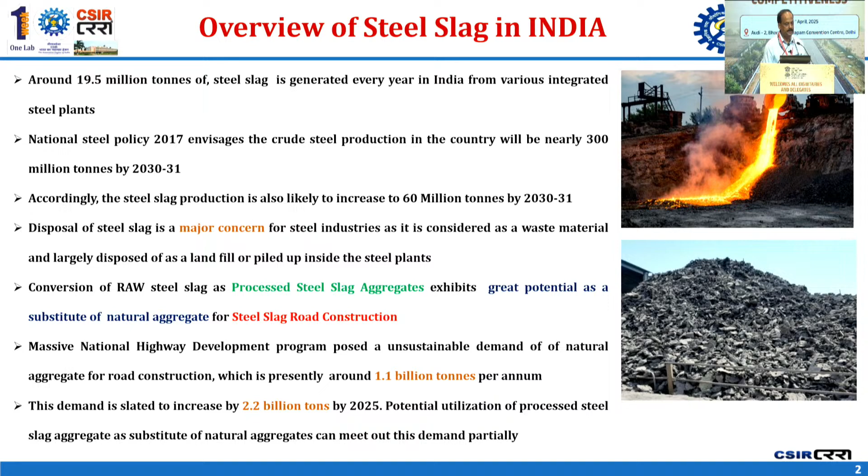So the steel slag based road construction provides an opportunity where processed steel slag can substitute natural aggregates. In terms of steel slag produced from various steel industries, currently it is 19.5 million tonnes, and by the end of this decade, it is going to exactly double.

We have already done trials. This is one example near Surat, a 6-lane facility in which steel slag has been utilized in all layers for flexible pavement construction. Another example is NH66 from Mumbai to Goa.

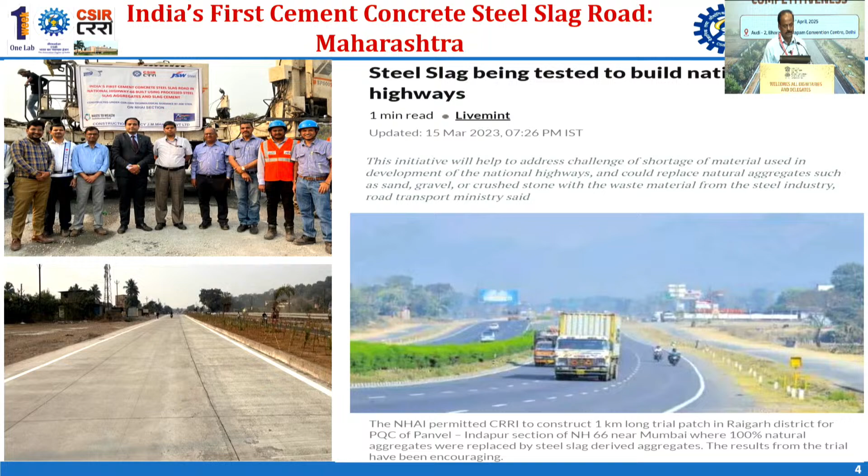In fact, we did it in association with NHAI, where steel slag has been utilized both for construction of cement concrete roads and bituminous roads, and in all layers steel slag has completely replaced natural aggregates. Another example is a trial at Arunachal Pradesh near Ziro Valley.

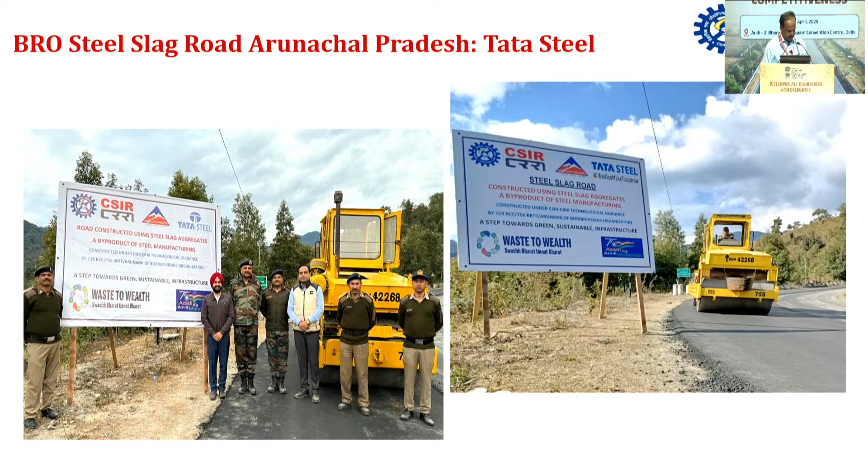This was basically for the design of overlays, for a 40 millimeter BC overlay, where steel slag was used. This project has been possible because of sponsorship from the Ministry of Steel, done in association with AMNS, Tata Steel, JSW Steel and RINL.

It has received attention of the Honorable Prime Minister because the project is being pursued under the Mission Waste to Wealth, which gives a specific mandate of using various industrial wastes for construction of road infrastructure. Steel slag guidelines have been prepared by the Ministry of Steel and disseminated to MoRTH, and currently it is also under consideration of the H2 Committee of the Indian Roads Congress, because at the end we are expecting an IRC document on the basis of which it will be possible to scale up its application.

The second is replacement of bitumen. This is the idea of biobinders from agricultural waste. Currently we have a project sponsored by the Ministry of Road Transport and Highways. CRRI has a patent where it is possible to replace 10 to 20% of bitumen by bio oil, which is produced from rice straw.

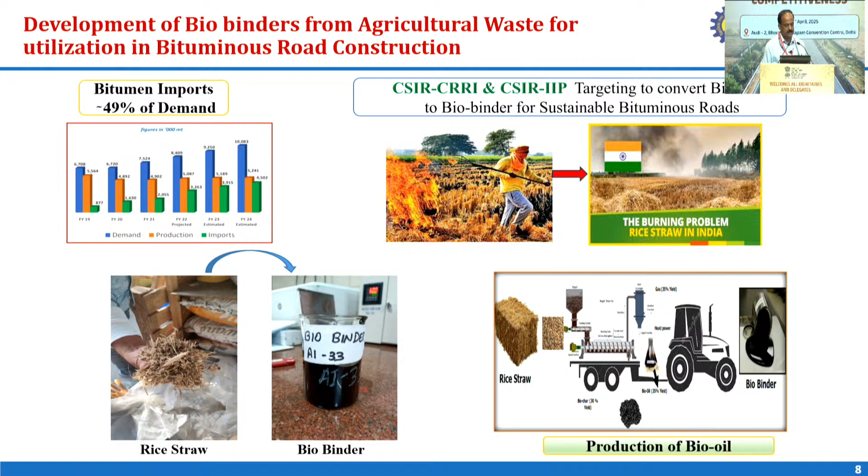Because of the parali burning problem, this has been taken up, and CRRI, Central Road Research Institute, in association with IIP Dehradun, developed this technology. We did a trial at Jorabat between Guwahati and Shillong, and another trial which is slightly different from the earlier process.

That earlier one was a bio-oil based biobitumen, but this one is from lignin, and we did trials with 15% replacement and 10% replacement. Currently we are doing finishing testing with Indian Oil.

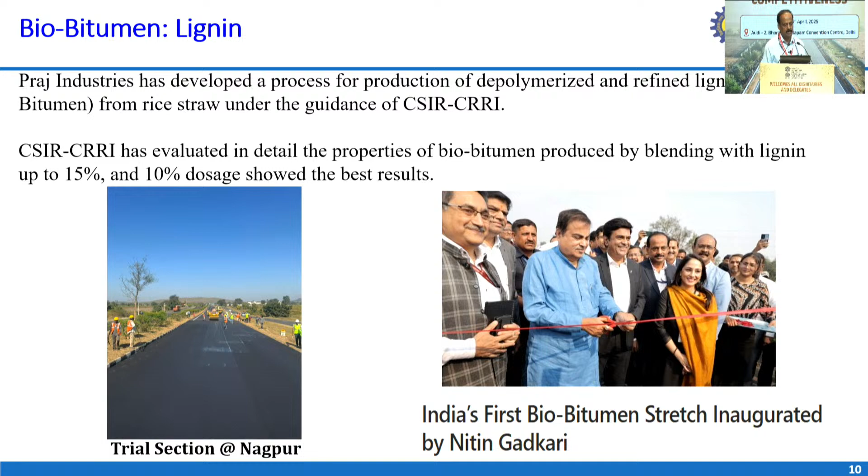The Honorable Minister has reviewed the whole activity. A 1 kilometer trial has been done near Nagpur, and we have been asked to put up detailed specifications and standards for this lignin-based biobitumen, so that it can be utilized for road construction.

A little bit about cold mix technologies. If we make a comparison between cold mix versus hot mix, although this is for rural roads, in terms of fuel, for cold mix construction it is 90 liters of fuel, while for the same reference, hot mix is going to be 1698 liters of fuel.

So, in terms of carbon emissions, the cold mix is going to be very effective, but in terms of practice, although in a lower category network it has been very effectively utilized, we are yet to see its application with respect to higher categories.

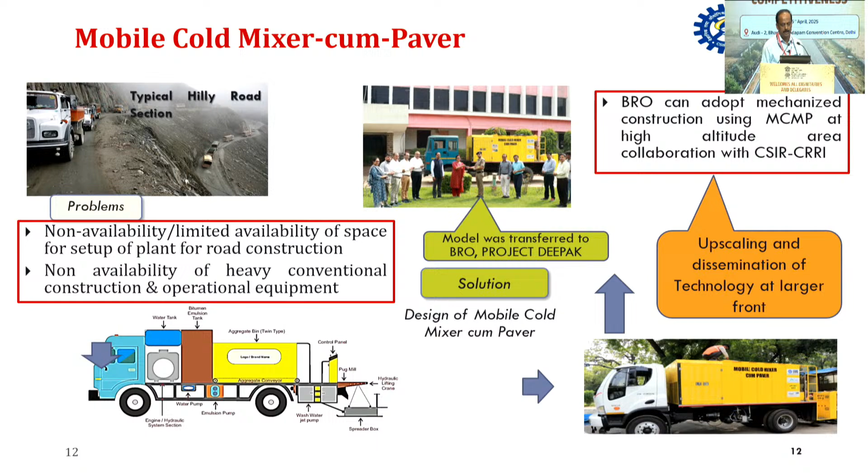This is one mobile cold mixer cum paver we have developed and transferred to BRO. The technology can be used in hilly areas. Currently the equipment is in Himachal Pradesh, deployed for different projects of BRO. So NHIDCL can take benefit of this.

This is a road which has been constructed using this mobile cold mixer cum paver. This basically addresses the challenge of space limitation to set up a plant through a mobile mixer. You can do that paving work.

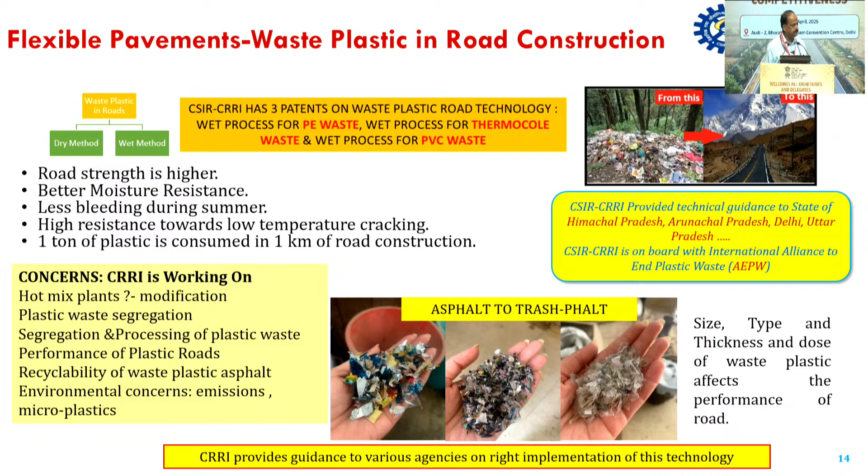The institute is working on usage of waste plastics for road construction. There are 3 patents with respect to the wet method of mixing, and currently we are working with one particular agency, Alliance to End Plastic Waste. So there is great opportunity of utilizing plastic waste for bituminous mix road construction.

There are certain other technologies developed by the institute. This one is used for pothole repair. Very recently we did a demonstration with the government of Delhi to the PWD minister, showing how to repair a pothole without dewatering. The technology has entered into agreement with the government of Assam and is in discussion with the government of Karnataka for wider application. Currently cold emulsion based mixes are being utilized for pothole repair.

This is an alternate that uses the cold process only. The other technology under discussion is the EcoFix.

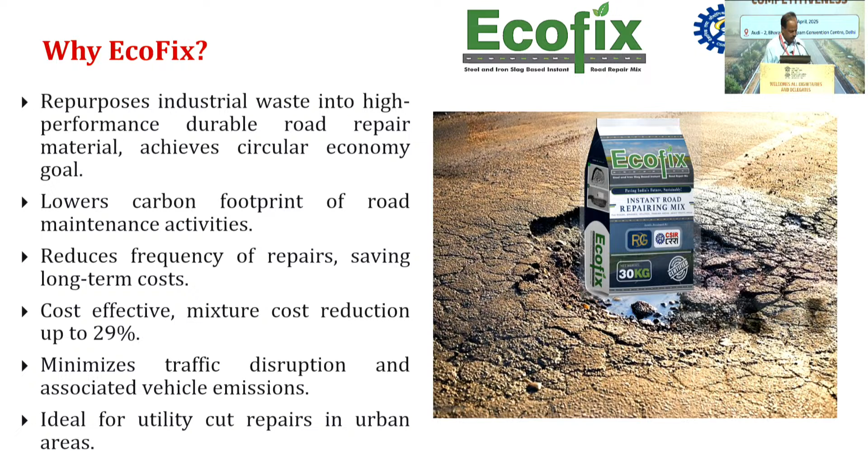As an institute we have the mandate for developing technology and transferring it to industry. Then there's the idea of recycling—currently we have a limit of only 30% RAP that can be utilized, but can we go for higher RAP? With NHAI support, we are doing projects with higher RAP content, because the idea is recycling and reusing the material that is part of the highway cross section.

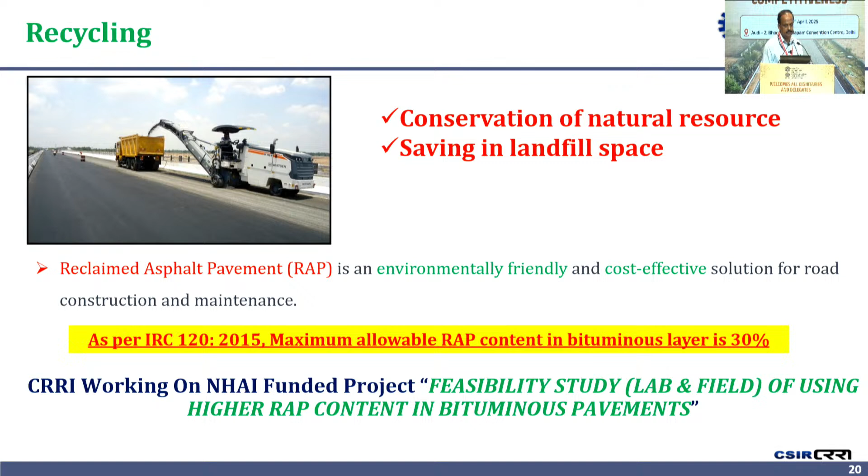Field trials are on with 35%, 40% and 45% RAP, and based on the performance results, it is possible to make revisions in the IRC document where we currently have a benchmark of 30%.

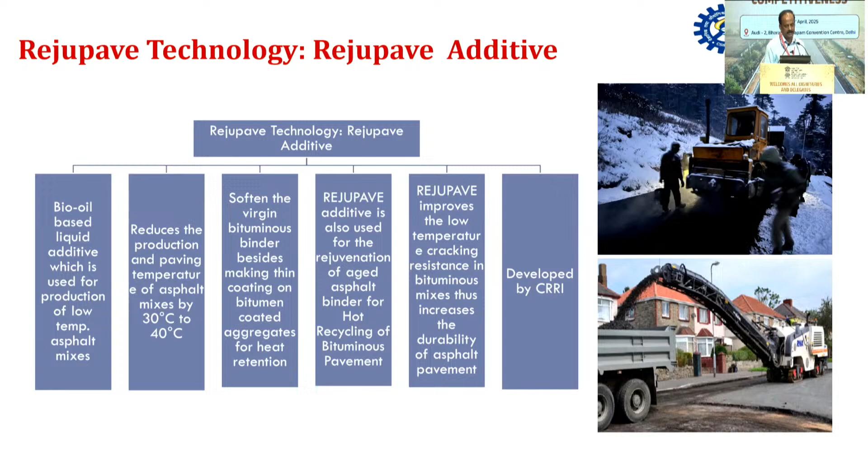CRRI has another Rejupave technology very successfully used by BRO. Currently we have even done a trial in Bhutan. This is essentially to work with lower temperature and also in terms of using recycled material. In very high altitude areas, the technology has been utilized very effectively.

This is one more rejuvenator. The institute has a lot of interest in various rejuvenating agents. This is a rejuvenator technology transferred from CRRI to the OOMS industry, and it is also a potential material that can be very useful for recycling bituminous pavements.

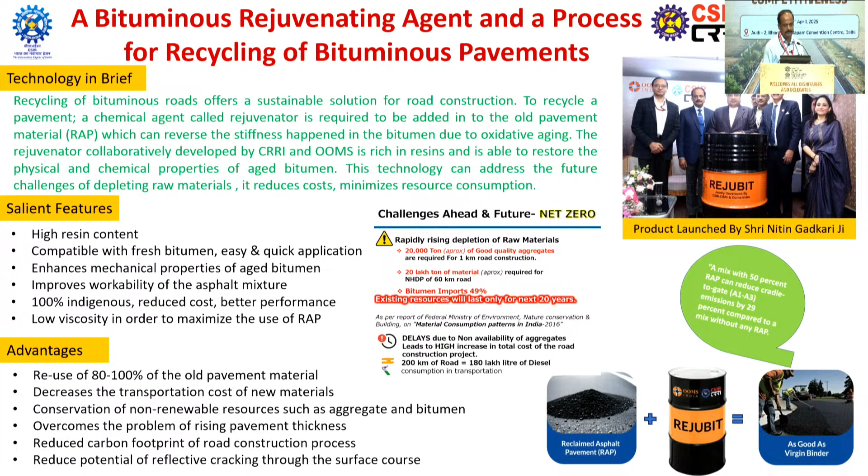So I will just conclude with this. I'm really grateful for the support of the Ministry and NHAI in terms of trial sections, but the limitation is that these ideas need to be scaled up.

Sri Nirmal has already pointed about the challenges, because today if you look at the trial patches, they will not cross triple digits—it is less than 100 kilometers—and in certain cases, although concessionaires are utilizing these technologies, they are not being reported.

These forums provide a great opportunity where we can share our experiences, especially since steel slag has been utilized by a lot of concessionaires, and the dissemination is certainly going to help the sector in a very big way. I believe various technologies take time.

Many times the industry expects you to provide a ready-made technology, but it is never available on the shelf. I urge the industry to be a partner in the development process, the way we are getting trial sections from NHAI or MORTH, because co-development is the only way possible. You can't expect a finished product, but these technologies have great potential when we look at the future of highway infrastructure development in the country.

So thank you very much for this opportunity.

Thank you, Professor Parida, for explaining about various new technologies which are in development phase. What do you expect in terms of code requirements for steel slag to promote further and bring confidence in the users? I think the challenge is that the more trial stages we give, the more confidence we get—that is also very important for the authorities.

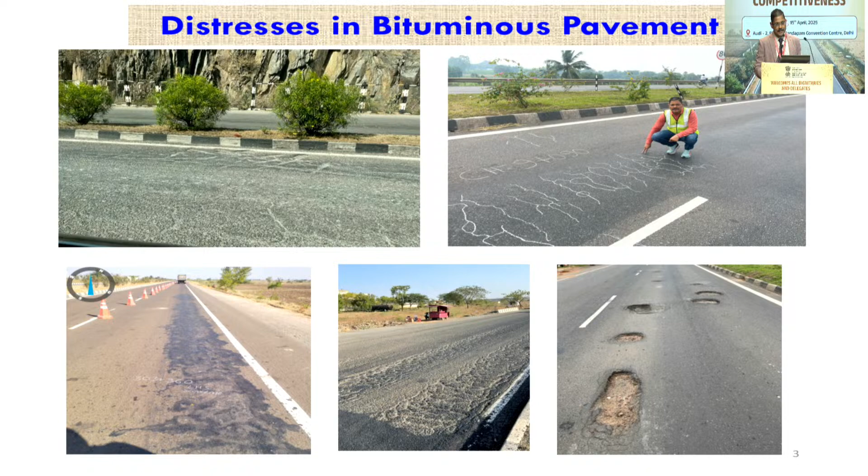With 300 mm thickness, definitely you cannot blame the subgrade now. In spite of having very good thickness, the potholes were there. In fact, cracks are also there if you can see in the photographs.

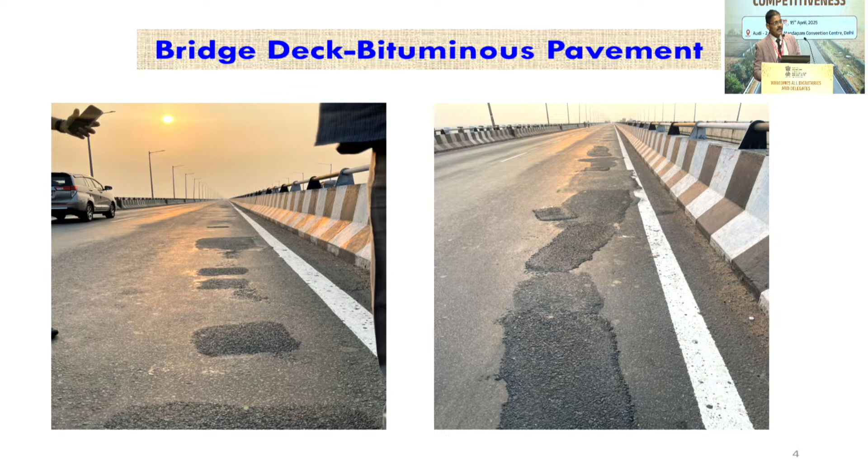Bridge deck has become another issue because of the selection of mixes for bridge decks - what waterproofing membrane is used, how do we select it, how do we lay it down, what kind of quality tests we do on it, and what kind of mixes we have to select. I think very little attention has been paid to that. Because of that, you see a lot of failures on bridge decks in many places.

So this is the way forward now: pavement evaluation, rehabilitation, preservation, or innovation. We're not going to discuss everything here - I'll just touch upon critical points on what exactly we are doing in different spheres right now.

If you see this particular lifeline of the pavement, it starts very good in the beginning - excellent conditions - and then gradually deteriorates. It's quite possible that for some pavements this graph may not look like that - it may deteriorate very fast, come down very quickly. It may come down like this, or for some pavements it may go like that instead. For that, you need to understand what kind of pavement condition exists, and how to deploy techniques to improve this deterioration graph.

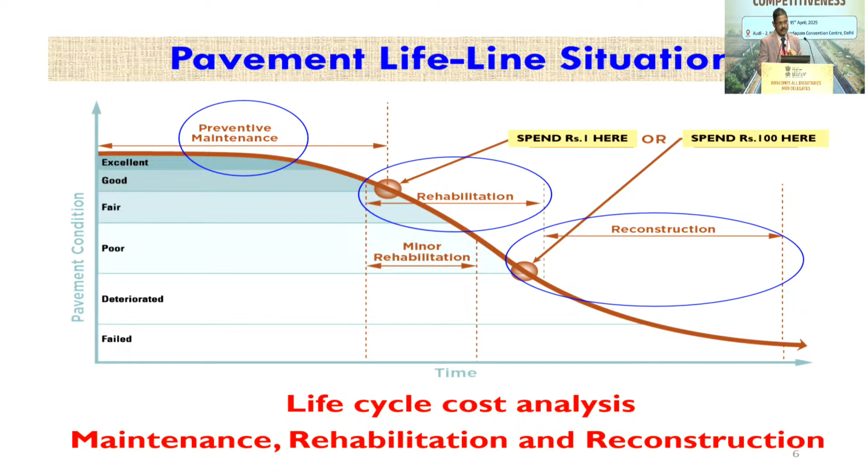There is IRC 82:2023, which recommends that the pavement condition index has to be determined or quantified for a particular pavement section. It has certain parameters - riding quality, potholes, rut depth, cracks, raveling - you do all kinds of distress measurements, and based on that you calculate the PCI index. Based on the PCI index, you determine what kind of treatment is required for that particular highway. In some instances we've seen overlay is not required, but overlay has to be put up because of contractual conditions, or sometimes the debate comes whether microsurfacing can do the job or BC is not required. So that kind of debate comes up.

In fact, right now a lot of advancement has come in this area. We are going to talk about that also.

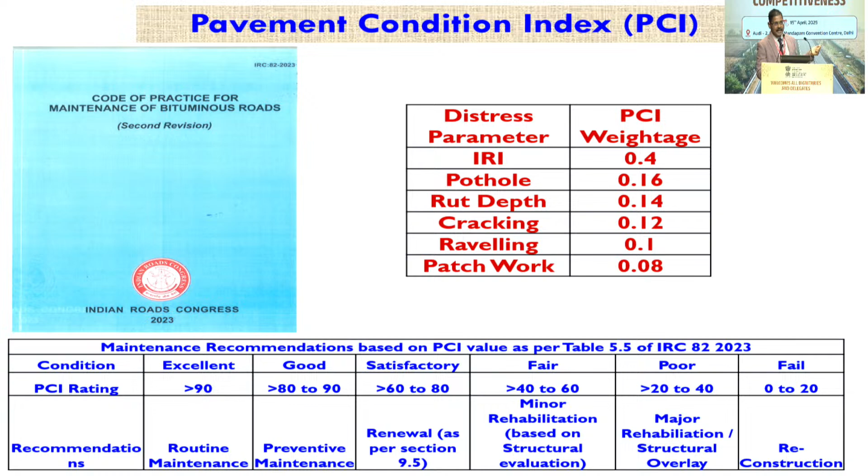There are certain techniques for operation and maintenance, and I will show some critical examples later on. You can use microsurfacing or thin overlays, or use some innovative combinations of recycling. I will show you some examples of where we are really hitting the points and where we are heading.

There is certain improvement in this direction too. People are talking in terms of constructing something, some overlay, and nothing should happen for at least the next 10 years. New additives have come, polymers have come, modified binders have come, hybrid CRMB have come, waste plastic is also coming up. So we have to definitely innovate.

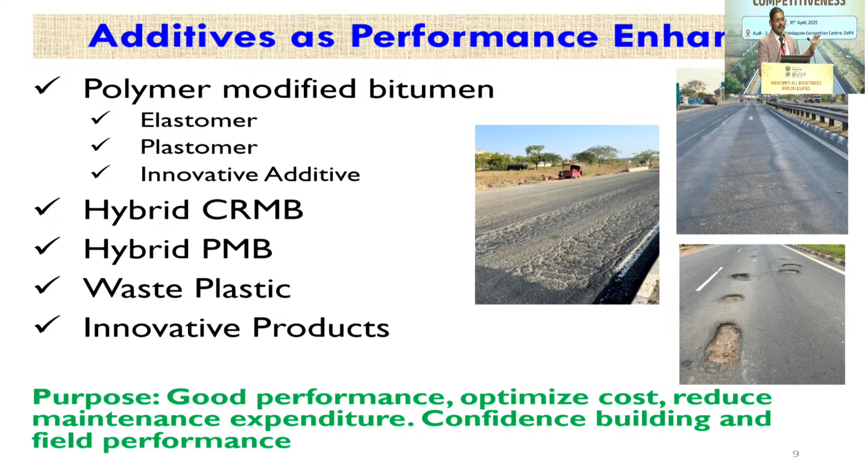In spite of that, certain failures are coming up because of concerns somewhere else that we have to address. We also have to improve some paving practices. We keep on talking about materials, we keep on talking about designs, but how about the paving practices?

Who is going to construct the roads? In fact, in the morning we were listening about where the engineers actually are. Who is going to construct the road? What kind of education can we transfer to the ground people so that they can execute things better? This is what we need to understand.

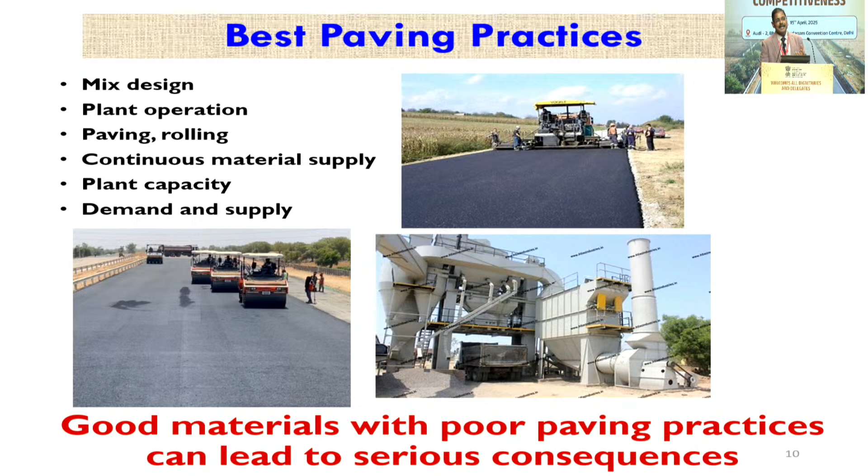Technology is not going to help you. You have to really adapt the technology to bring quality outcomes from that. This is one of the projects that we have done on a National Highway project, and thank you to the Ministry and National Highway for giving us that particular trial stretch.

The debate was quite simple. For a BC2 mix, the minimum bitumen content is 5.4%. On one particular project, the aggregate quality was quite good, and the contractor was quite sure that if he used 5.4% bitumen, it would bleed out.

However, how do we prove that we cannot use 5.4%? On that particular project, we constructed almost 4 kilometers of stretch using the performance-based design approach. We demonstrated that if you construct using 5.4% bitumen content, depending upon the quality of the aggregates and other factors, it is quite possible you may see certain failures.

We did a cracking test, we did a rutting test. Based on that, we optimized the bitumen content. Remember, it is not like a cut-and-paste formula everywhere. You have to really be very careful about what kind of aggregates are there, what kind of properties are there, and you can do the rutting test also.

I will go very fast through this. This test is becoming quite popular nowadays because a major concern for us is rutting. That can be trapped if you are smart enough at the beginning of your project, at the beginning of production of the mix, and you check it right there.

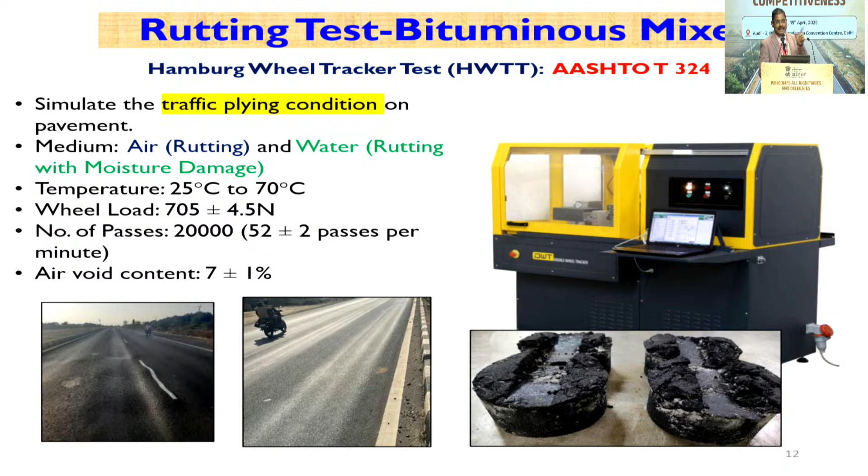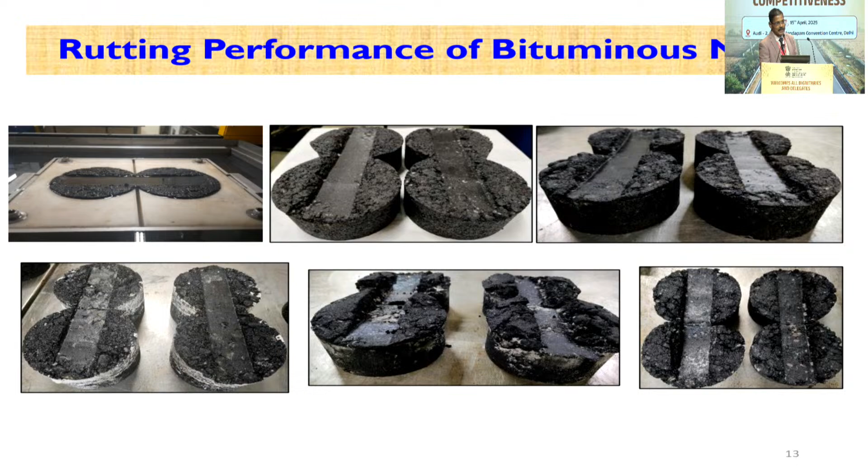This is how the sample looks like. Different mixes will behave differently. In fact, we have developed a certain tool. In the morning you saw we got a certain kind of certificate; it was based on a simple tool that we are developing now for the industry. Hopefully that will work out in the future.

This is another technique coming up nowadays, CGBM, which is called Cement Grouted Bituminous Macadam. One or two projects have been done; in fact, we are also deploying that particular technology. It sounds good on certain stretches where you have critical problems. So this is what is coming up now.

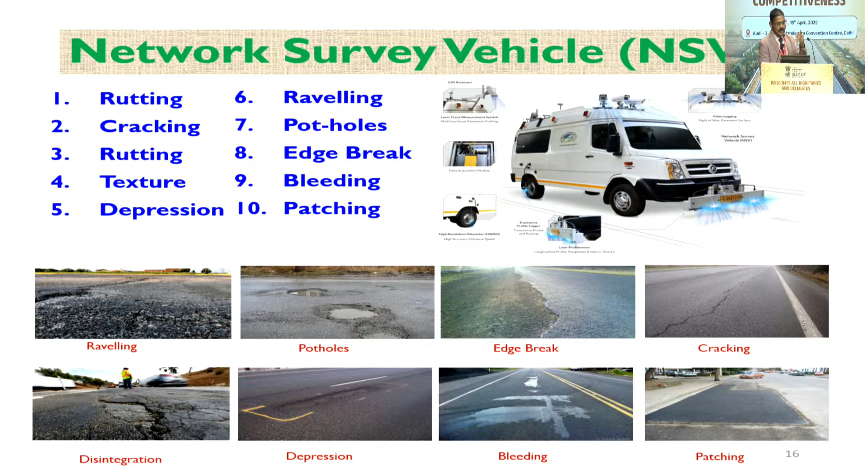I will just go over these tools now. Network survey vehicles have been used quite frequently on the highways, and you record all kinds of distresses. There are different kinds of distresses that you record. This is how the riding quality looks like.

Look into the riding quality now here. The riding quality requirement, as per our IRC specification guidelines and whatever IRC, US or other countries actually have.

If you see this particular graph, the riding quality on this highway goes abnormally high. This is the same case for concrete roads, same case for bituminous roads also. Not all roads, but a majority of some roads are behaving in that kind of abnormal manner.

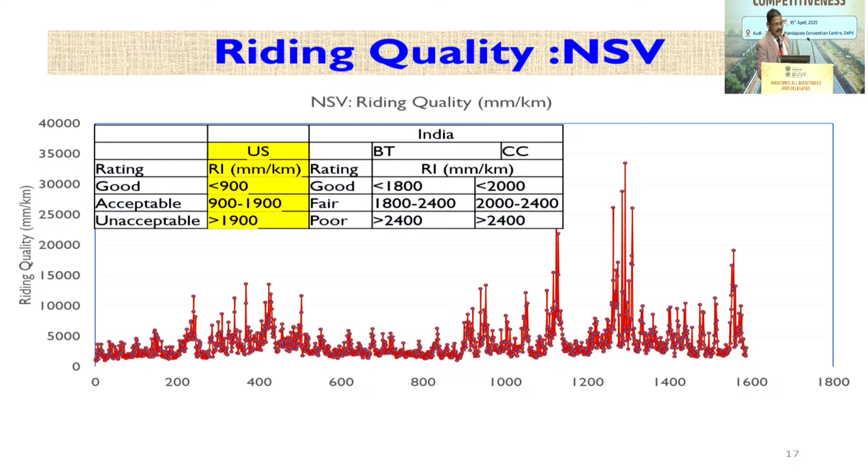What are the reasons? How do I take care of it? Some debate is also going on—do I need to do the riding quality using NSV or BI? I think we should not go into that debate anymore, because advanced tools have come up. They are more accurate, more mechanistic, fundamentally strong. We cannot rely on the bump integrator, which is a response-based system. So we have to think about that.

One of the clients or contractors started debating on this particular data. He said, Sir, NSV is giving you higher roughness index, but bump integrator is giving less. In my contract, bump integrator is written, therefore I will accept bump integrator only. I said riding quality is riding quality, and you are collecting the data from a certain tool, and there is a fundamentally strong background behind NSV, how it collects the data. But this is how the debate is going on now.

Rutting also can be measured like that. Now the falling weight deflectometer—if you see, there are a lot of questions in the industry about the falling weight deflectometer. I will show you some very interesting examples of how contractors and agencies are really fighting over that.

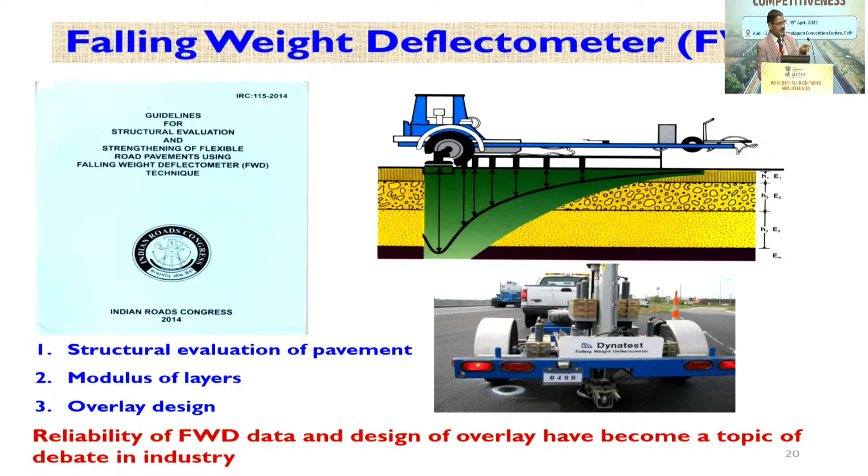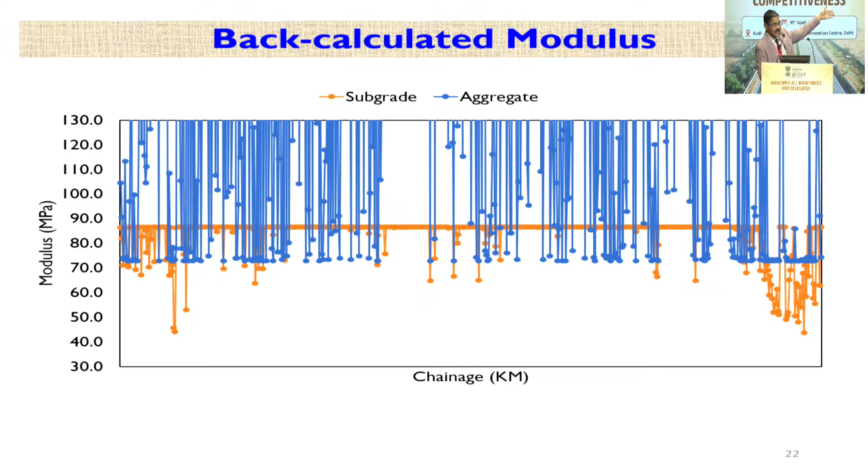In majority of the places, the subgrade modulus is less than—sorry, the aggregate modulus is less than the subgrade modulus. How is it possible? You have 450 mm thickness of aggregate and subgrade is there—how is it possible? But this kind of report has been submitted and approved. Think about the consequences of this kind of data: the overlay thickness will go 100 mm, 120 mm. There has to be some logical concept behind why this is happening, otherwise by now the pavement should have collapsed, if that kind of situation is really there.

Now, we corrected that particular problem because one FWD can give different results than another FWD, as all are doing it differently. Some people call it a black box. If you see this overlay thickness which was designed earlier, and you really pay attention to the data and look at it carefully—how the analysis has been done, what kind of tool has been used—you will find the difference.

Now comes milling and overlays—it's a very common job nowadays. In fact, we have seen brand new roads getting milled and then overlay put on top. Now another thing has come up: glass grid. There is a lot of claim that if you put the glass grid below the BC layer, the life goes up to 10 years. In fact, one of the major highways connecting Mumbai to Jaipur—if you visit that, you will see a lot of slippage failure, almost more than 30 to 40 kilometers. A lot of failures have come up.

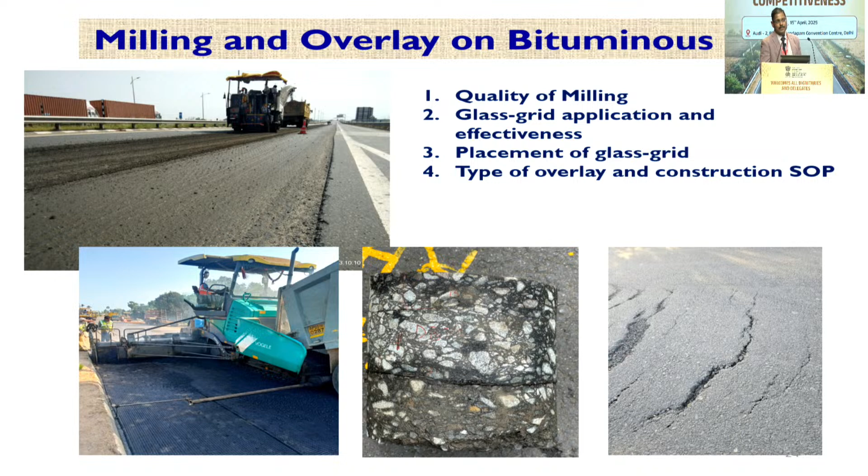How do I take care of it? What kind of design do I do? What kind of precautions do I need to take? This is how we need to look into that. The quality has to be achieved once you understand the kind of technologies and how they have to be implemented properly.

Another comes the white topping actually. It's very popular. In fact, Maharashtra is leading in that particular area and a lot of good work is going on actually now. The question here is, how do I understand the bonding, debonding, how do I understand the performance of the white toppings actually?

The failure comes, why the failure comes actually? What is the role of the bituminous layer in that actually? This is what we need to really look into at this particular point of time, otherwise it will be too late for us actually later on in the future.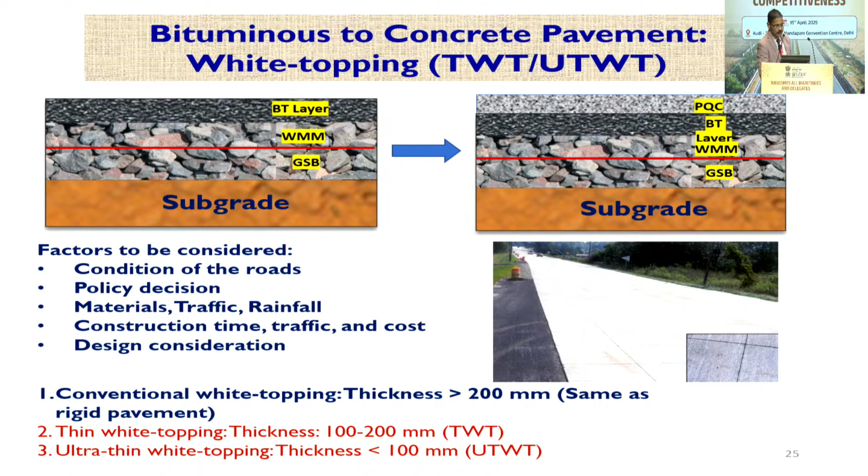Lot of distresses, lot of repairs, and I have seen different practices of doing repairs of the concrete pavements actually. Somebody is innovating themselves, somebody is doing their own understanding, somebody is doing stitching in their own ways, somebody is doing stapling in their own ways, different practices are going on. Many agencies, they all are doing different work actually. But the concept is same, failure is same actually.

Other interesting thing is the construction, the riding quality of the concrete pavement. You see one example. Concrete pavement riding quality, the index has to be 2000 or less, but this is how it looked like. It is 4000, 5000, in fact more actually.

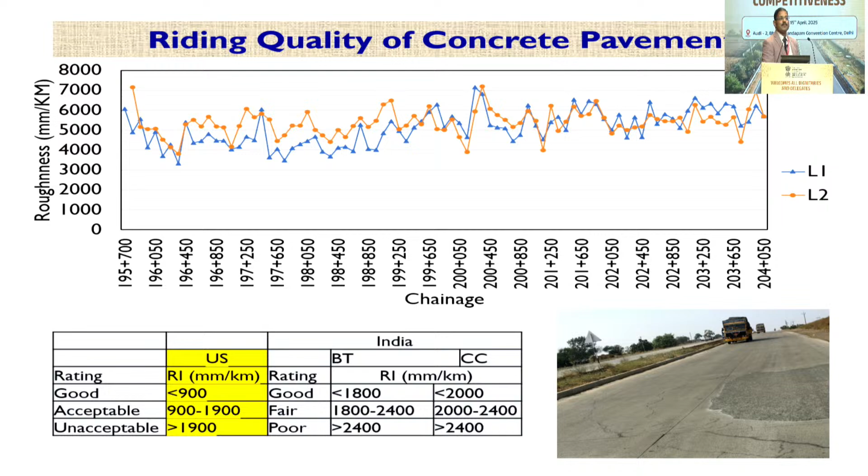The question comes, how do I improve that actually? Either I can use micro milling, or I can use diamond grinding, or I can use asphalt overlays, or I can use micro surfacing. Something has to be done.

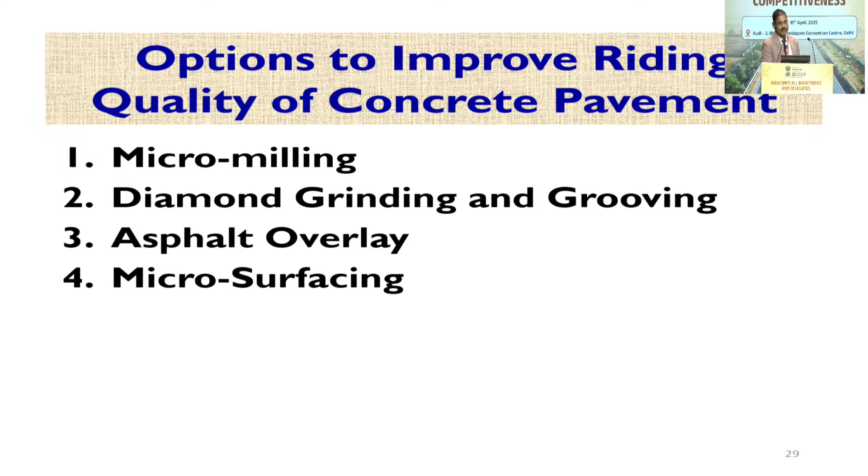The riding quality, you cannot reconstruct your highways and then do it again. And what is the guarantee that reconstruction will help you? Again you will come back to the same. So some of the things are there actually.

Bituminous overlay, in one of the projects we have done the bituminous overlay using a certain kind of different mix design approach, and we found it quite interesting with positive outcomes. However, we have to take care of the kind of joints, the kind of cracks that are there on the concrete pavement, otherwise reflective cracks will come up. This is what we are supposed to look into, this is one of the solutions.

But recently the ministry has issued a circular that you cannot put BT overlay on top of the concrete actually. We need to look into that, because this is quite popular all over the world actually.

Other thing is micro surfacing, don't waste your money on that. One layer is not going to help you anything actually. If you are putting 6 mm micro surfacing on concrete pavement and assuming that the riding quality will improve substantially, it will not happen. You need to think something bare minimum, at least 30 mm, to improve the riding quality actually.

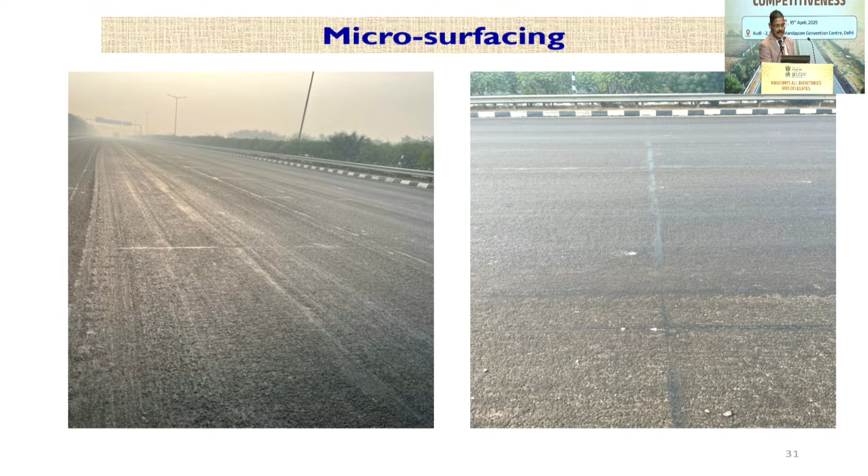But then you can think about 3 layers of micro surfacing or 4 layers of micro surfacing. This is one of the projects that you can look into. Just 2 minutes please, this is how it was in the last 2 slides. This is how the micro surfacing looks like.

Another thing which is coming up now is micro cold fine milling actually. Some projects have been done in this particular area, looking at how to do that fine micro milling, whether it is really the right approach or not, that we have to discuss. It will definitely cut out something and improve the riding quality.

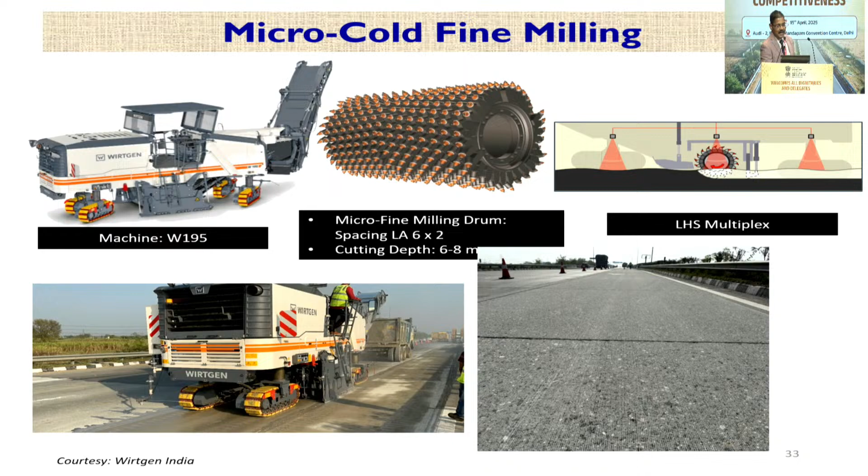Another approach is diamond grinding, which we don't have any equipment right now in India for doing the diamond grinding and grooving. Definitely some small scale grooving equipment may be there, but diamond grinding is altogether different equipment. If you see the photograph on this side, this is how the diamond grinding equipment looks like, almost more than 200 blades in one drum, which is going to travel together actually.

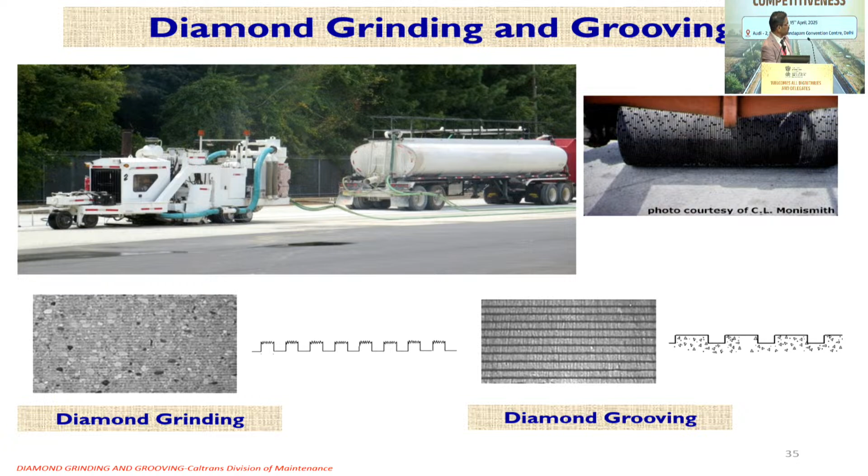This is how rehabilitation of concrete pavement is done through rubblization. Rubblization is quite popular in some countries. In the US, they do a lot of rubblization because the concrete pavement is completely out of repair boundaries. You have to think about rubblization, and that particular layer can become your aggregate base.

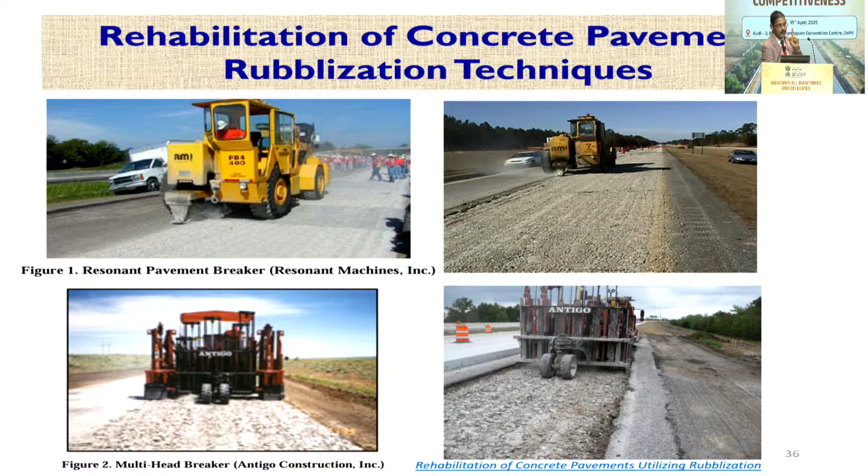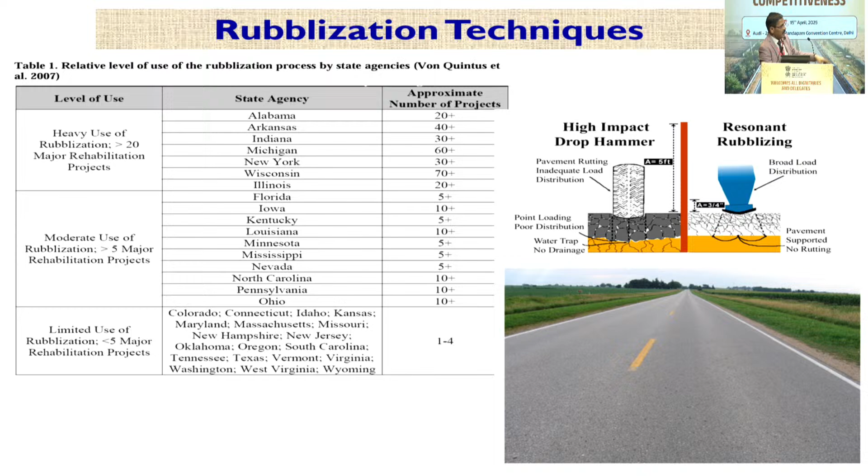But you have to use the proper rubblization technique. I'm not sure whether it has been done on highways, but I know one project was done on an airport. Many projects have been done in other countries, and in the US you see a lot of projects. This is a photograph of a rubblized project.

This is the last slide for me. Any technology development that you plan to adopt, please understand the technology, get technical support, train your team, have quality monitoring, accept it, and get feedback from the data in the field. Technology is not a substitute for poor paving practices. If your team is not good at adopting the technology, it doesn't mean the technology is going to help you. So with that, I will conclude my presentation. Thank you very much.

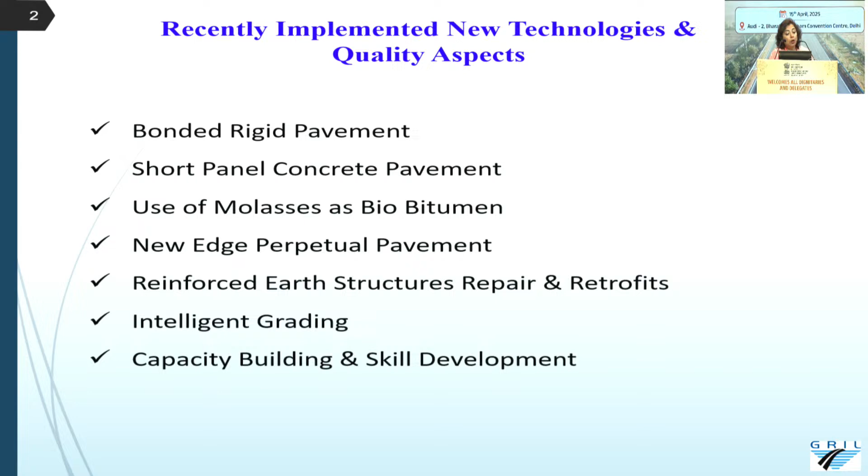Good afternoon, everyone. I will be discussing some of the technologies we have been using, the successes and failures, and also improving on the technologies. I will talk about bonded rigid pavement, some technologies of concrete and flexible pavement, reinforced earth structures, repair and retrofits because we see a lot of bulging, intelligent grading, and last but not least, capacity building and skill development.

Bonded rigid pavement has been in the IRC 58 code for a long time, but we have not used it. There is a distinct difference between conventional rigid pavement and bonded rigid pavement. We may think there is an apparent saving. When designed, the bonded rigid pavement PQC thickness comes out at 240mm compared to 300mm for conventional. In this case, the PQC and DLC are monolithically connected by virtue of mechanical bonding. We may do material bonding or mechanical bonding, but we have found success with mechanical bonding only.

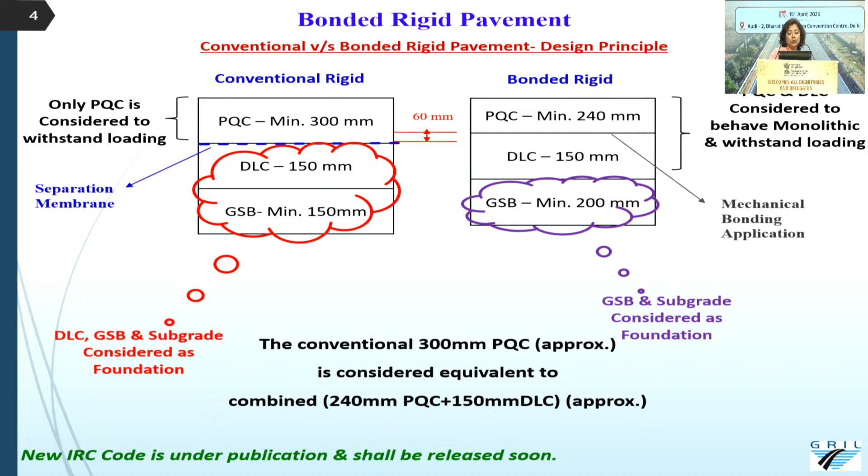Now we have constructed hundreds of kilometers of bonded rigid pavement in the states of UP and Bihar, and these are heavily trafficked corridors. The IRC code has been prepared under RK Jain sir's supervision and is going to be published soon.

On execution and quality aspects: after preparation of the GSB, when constructing the DLC, the strength parameter has to be 15 MPa. We keep a little higher strength, and paving has to be done in one go for the entire carriageway width. If that's not possible, we have to map the joints.

The essence of bonded rigid pavement is that we have to map the joints in DLC at the same places, and the vertical plane has to align with the upcoming PQC. We also have to seal the joints. Unless these quality aspects are maintained, it is not easy to adopt bonded rigid pavement. We can only adopt it when we are quite sure we can do it properly.

PQC has to be laid within 21 days of DLC laying, and mapping of joints has to be done, with joint cutting location using line dori and red paint. All meticulous quality aspects have to be followed. The bond strength between the PQC and DLC has to be maintained at a minimum of 1.32 MPa, and now we have to check this by extracting cores every time.

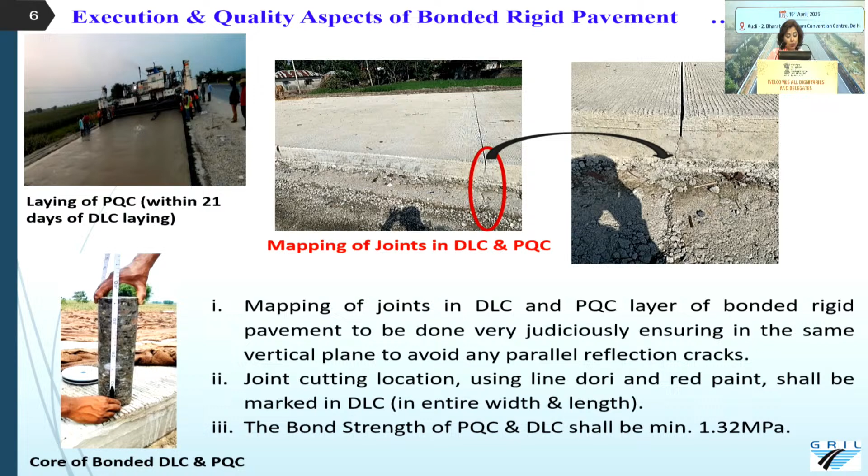The challenges are that if the joints do not fall in the same place, we will get a longitudinal crack across the entire project corridor, which is what we don't want. So those are the challenges in quality control. If we want to adopt any new technology, we have to also embrace the quality system.

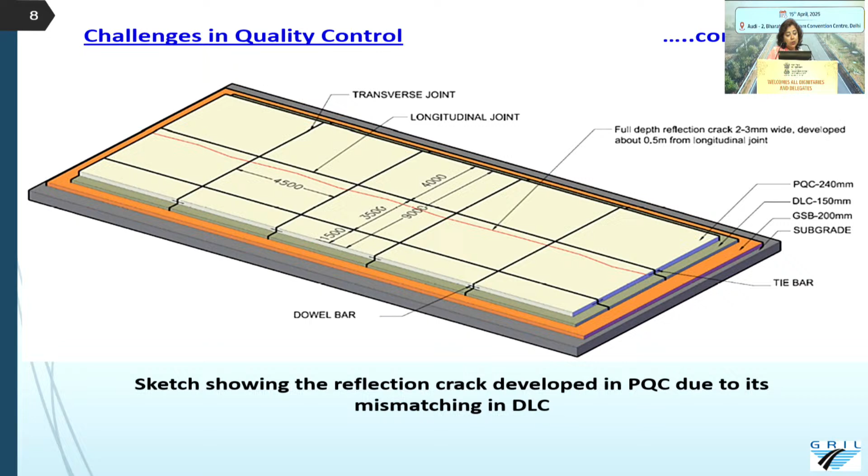A cost comparison shows there will be about 5 to 10% saving, but there will be additional load like joint cutting and sealing of the DLC, so the saving, though apparent, does not happen that much. Here are snapshots of the constructed bonded rigid pavement on a heavy traffic corridor, and from the core you won't find any distinction between the M40 grade of concrete and the M15 grade.

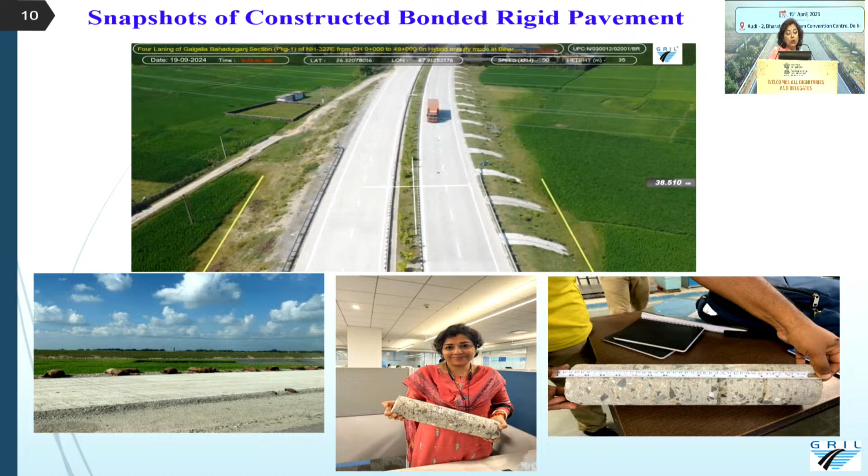There is no distinction at all. It is so meticulously constructed with mechanical bonding by virtue of texturing.

Coming to the short panel concrete pavement, we have done a trial patch of about a kilometer, again a heavily trafficked corridor in the state of Chhattisgarh. It may be apparent that when we are reducing the slab size from 4.5 meter by 3.5 meter to a 1.5 meter square slab, with thickness reducing to 240 mm, it may apparently look like a saving, but no. There won't be need of dowel bars or tie bars, only required at the expansion and construction joints. It's very easy for maintenance and lesser thickness to handle.

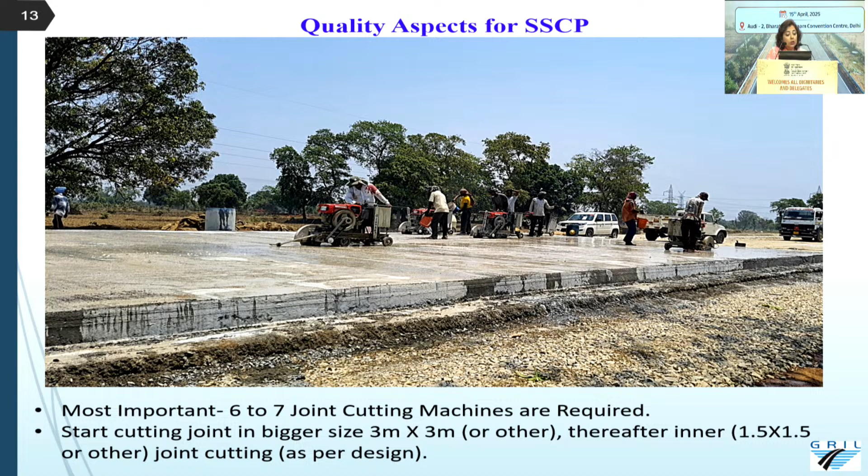Now the quality aspect: we have to maintain 6 to 7 joint cutting machines on the same day, because otherwise if the joint cutting machines are not there, it is not worth taking up SSCP, the short panel concrete pavement at all. We have to start cutting joints in bigger size like 3 meter by 3 meter, and thereafter coming inner, 1.5 meter by 1.5 meter. That is the quality aspect for making this technology a success.

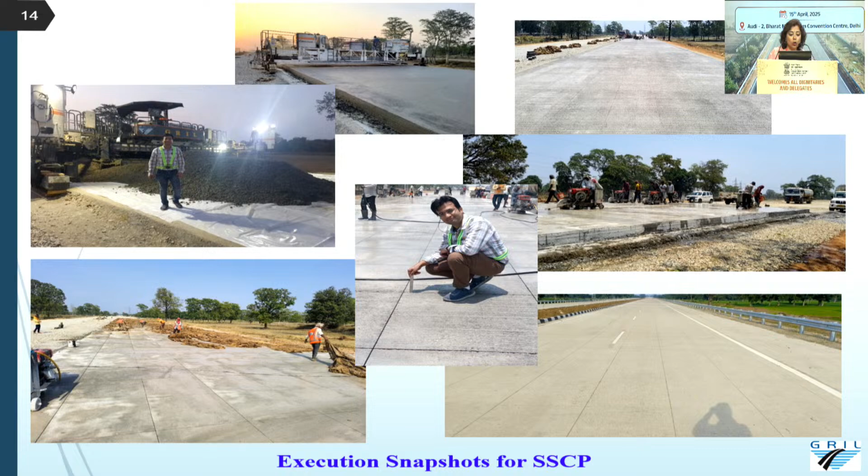These are nice pictures. Mr. Yash Pandey from my team executed the work, and heavy traffic is plying on the corridor with success. A little bit of cost comparison shows about 10% saving, but the joint cutting has to be embraced, otherwise it won't be a success.

Coming to sweet pavement, performance as sweet as its name. What is it? Under the leadership of Professor Nikhil Saboo of IIT Roorkee, we have implemented use of biobitumen or molasses in bituminous wearing courses.

The molasses quality aspect has to be followed in this case, the mixing. When the molasses are mixed, the bitumen should not be heated more than 110 degrees centigrade, and the shearing rate will be 500 RPM, mixing time 15 to 20 minutes.

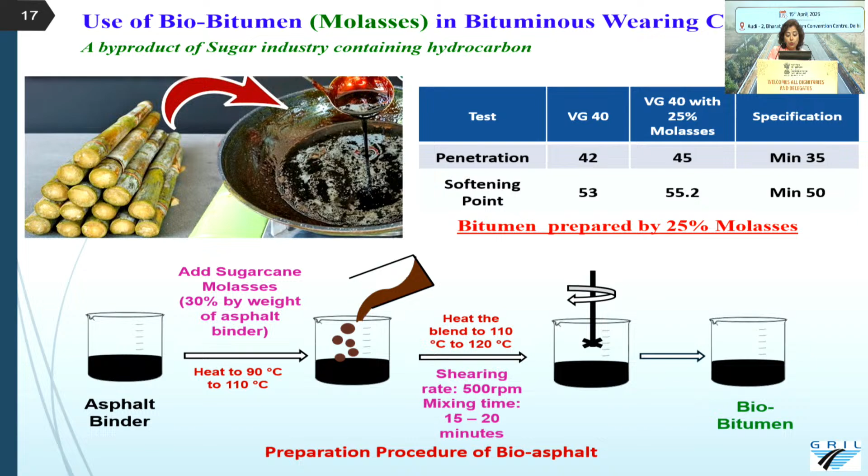But what is happening is that there will be some plant changes required. Unless we have a little bit of upgradation, a little bit of investment, we can make this molasses a success, the biobitumen a success.

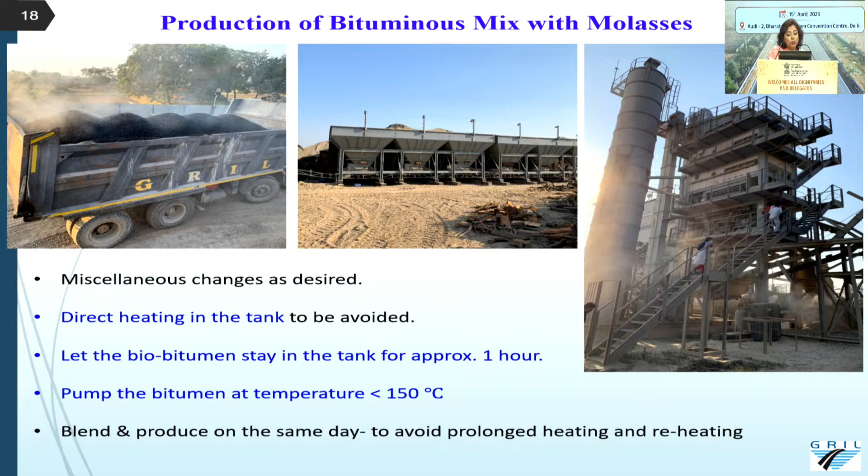The biobitumen pumping temperature should not be done more than at 150 degrees centigrade. The blend should be mixed and produced on the same day it has been prepared, because prolonged heating may result in a Maillard reaction, and excessive heating and foams and fumes come out when mixing the molasses with virgin bitumen. We have used VG40 and mixed the molasses in VG40 bitumen, and the plant will run at 80% capacity.

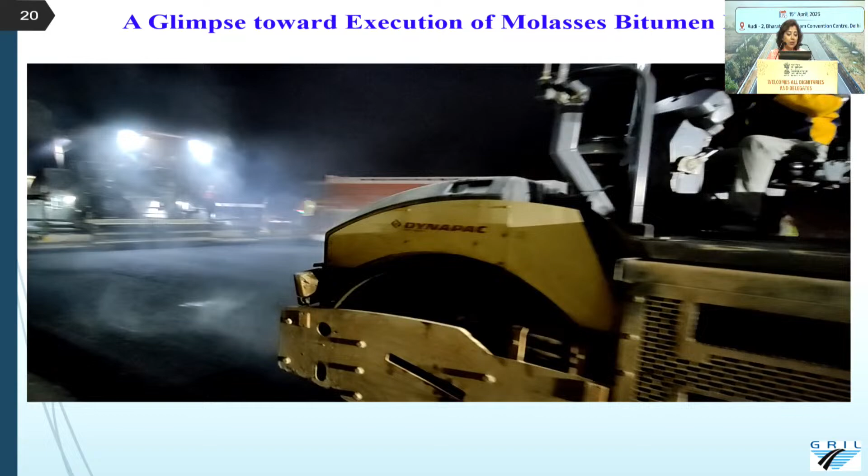We can assume a little bit of glimpse of what we constructed, and the traffic corridor is like 200 MSA. This was laid at night time, so we can see a little bit of fumes coming out. This is during construction, Shamli Muzaffarnagar area, just after construction, then after 1 year, then after 2 years of construction. There is no rutting, no cracking, nothing.

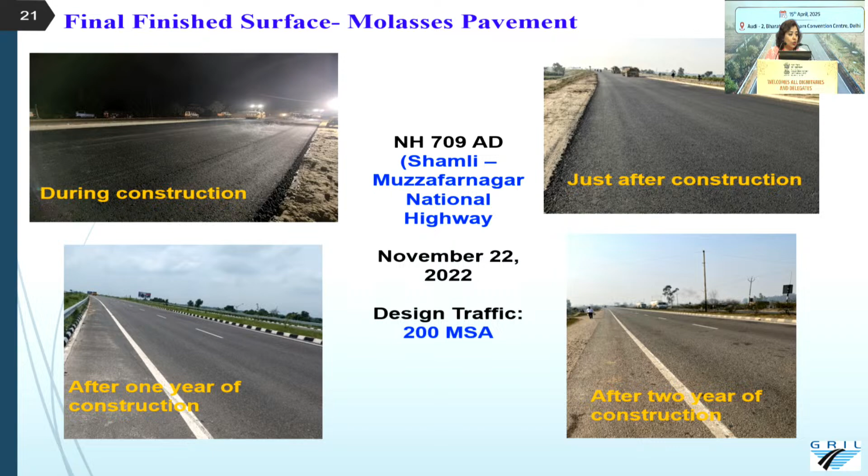So biobitumen, can it be termed as a modified bitumen? With this heavily trafficked corridor of 200 MSA, using VG40 and replacing 25% of VG40 with molasses, there will be a direct saving, and our dependency on importing bitumen will reduce. It will be a smart way of working with waste materials also. We can term it easily as modified bitumen.

Future work is going on because we are going to use it in our next project. We are trying to mix it with RAP bitumen also, and lay molasses RAP bitumen, and use it in DBM also.

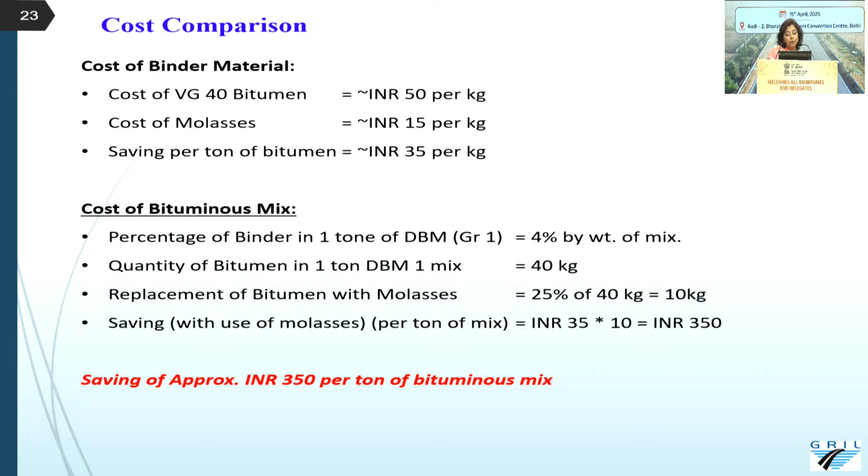A little bit of cost comparison: 50 rupees per kg for VG40 bitumen, cost of molasses is 15 rupees per kg including transportation, as we have seen in some areas. Saving per ton of bitumen is 35 rupees neat, it shows, but when we replace the recommended 25% dosage, the saving per ton will be 350 rupees. We can implement it with some care in plant modification.

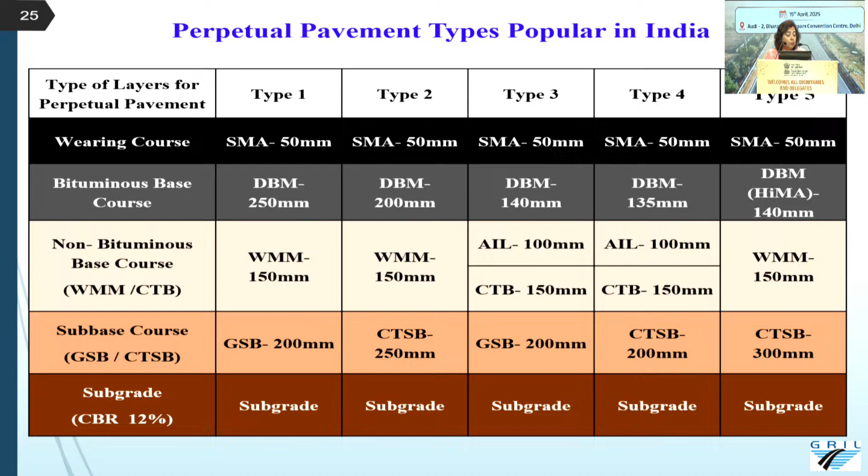Of course, it can be done with or without recycled materials, using FBBC, foam bituminous base course. Like we have 3 layers of DBM, the bottom layer can be replaced with a cold mix, where we do the foam bituminous base course, and it will serve as part of the perpetual pavement system.

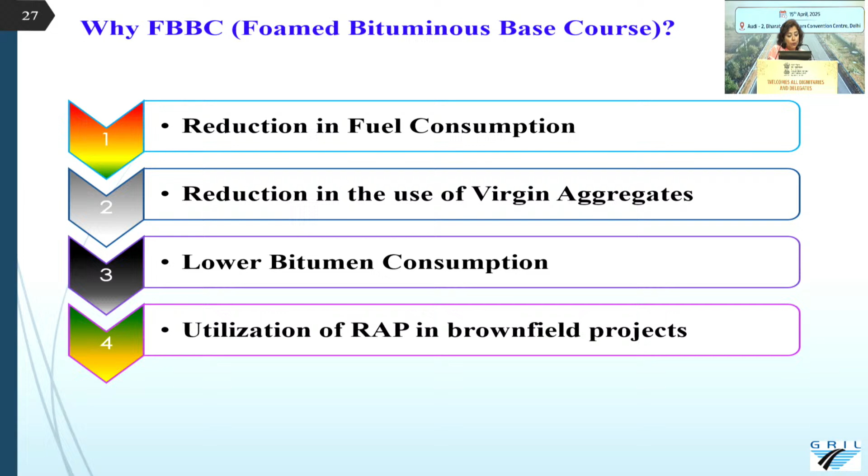This results in reduction in fuel consumption, we have already seen how the cold mix works wonders. There is reduction in use of virgin aggregates, lower bitumen consumption, and utilization of RAP in brownfield projects.

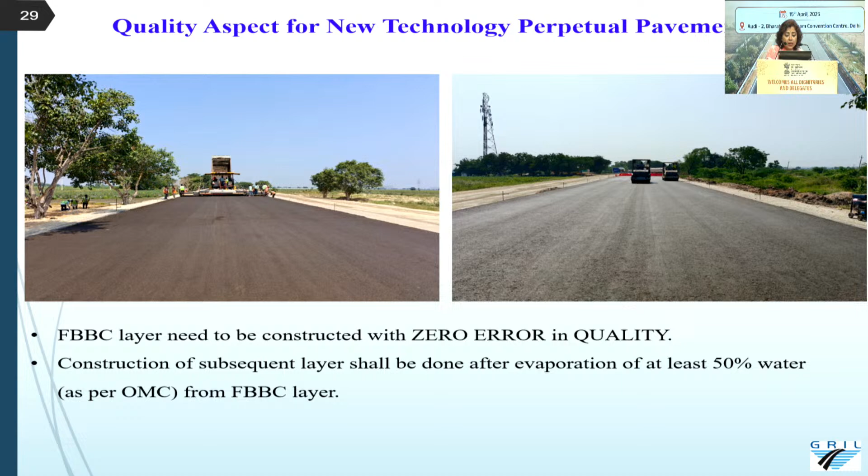This project we are going to employ in our upcoming project, Kolkata-Varanasi Expressway.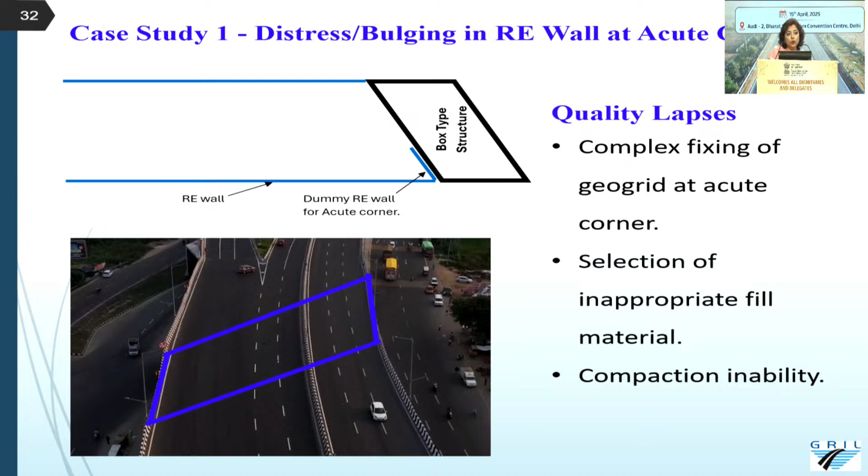Reinforced earth structures, repairs and retrofits - this is an unwanted case. Sometimes unintentionally something happens due to quality lapses, mostly in RE walls constructed at acute corners, because there is complex fixing of geogrid at acute corners, compaction is not possible in those areas, and there is selection of inappropriate fill material. But we have all kinds of box structures, LVUPs, SVUPs constructed across our highways.

So as part of mitigation of quality lapses at acute corners, what we do is a lot of nailing. Nailing ensures the stability of the RE system, then we monitor during the DLP period that no further movement occurs. But aesthetics is hampered due to the presence of the service road and people commuting, and people take photographs and put them in newspapers.

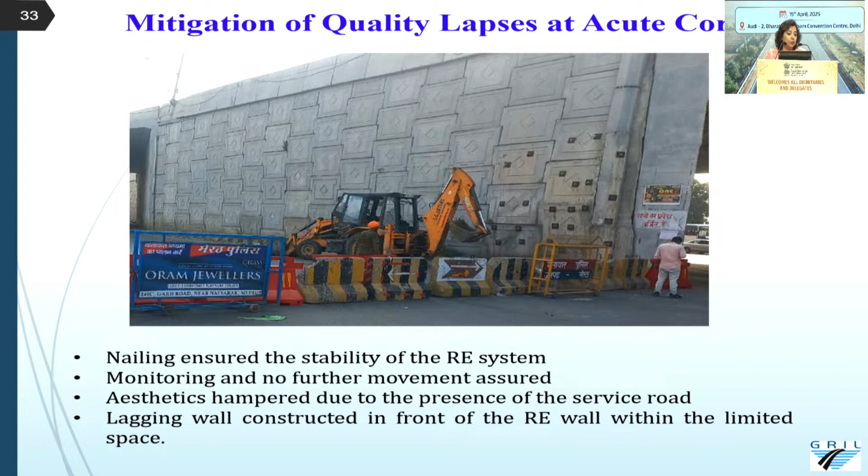So what we did is, after the nailing work is done, we constructed a lagging wall in front of the RE wall within the limited space, because we do not have enough space since the service road is there. So this is a scheme that works.

Instead, we can forego nailing and construct such a lagging wall in front of the RE wall, so that it takes care of the bulging. It is anchored to the main parent system. The foundation system is pile foundation, 600 mm thickness only.

The length of the anchoring nail is 12 meters, placed at 2 meter center to center. The space requirement is only 2.5 meters. The costing is also only 1.5 to 1.8 lakh per running meter depending on the height of the wall. So this is how the lagging wall is constructed.

We have seen how the nailing was looking in a bad shape. So the pile foundations are done, and step by step the wall is constructed, and in the last picture we can see how stable it looks, giving a good feeling to the commuters - it is stable with no issues regarding the stability of the wall.

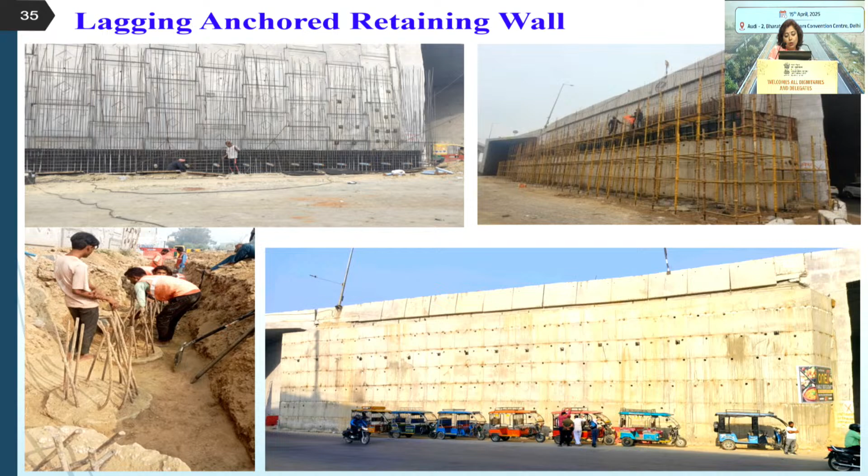Now coming to case study 2, on the hill road. What happened was a maintenance quality lapse - the site team took up maintenance work during the peak monsoon season, and removing the bituminous paving material during that time was not a good idea, then came the incessant rainfall.

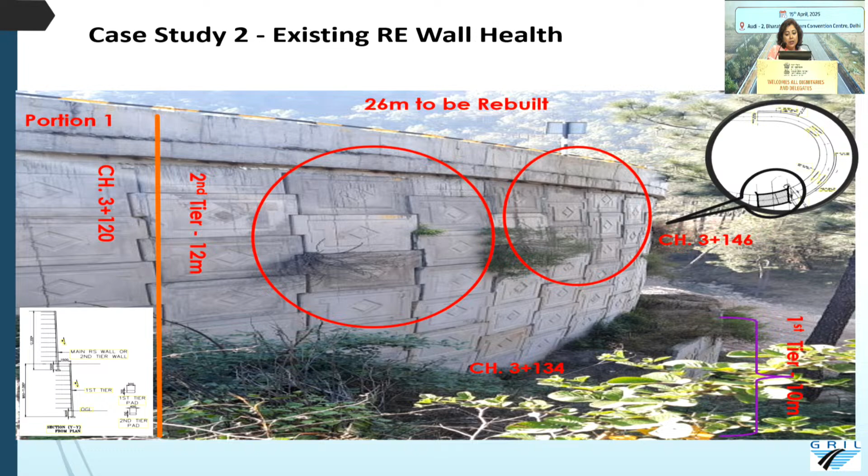So this 2-tier RE wall, which is 26 meters high, bulged - we can see the first tier and the second tier. How to repair? These are the nailing schemes done, and Terre Armée helped us with this.

The bottom tier wall was excessively nailed, since it is not a worthwhile idea to remove the entire RE wall system, which is 26 meters high. So we nailed the entire panel system in the bottom wall, and then jacketed the second tier and the first tier. The jacketing was done using 2 meter height steel welded wire mesh panels, with infill of crushed stone.

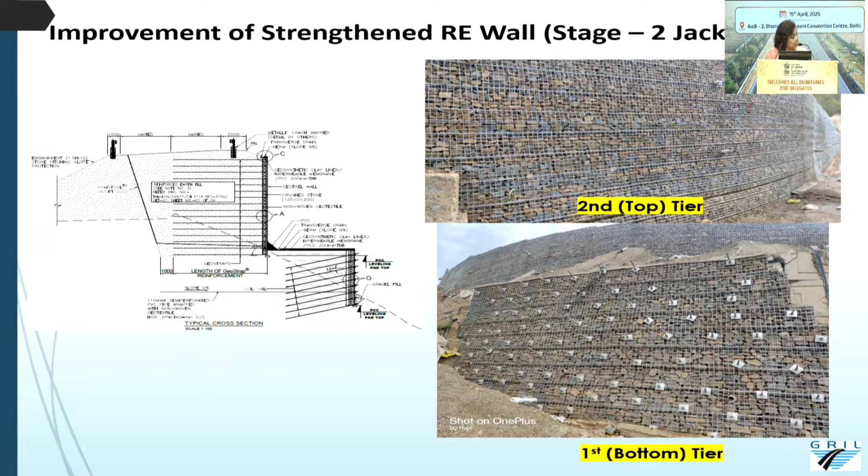So just the first 2 tiers, and with the top tier and bottom tier done, it now looks like a stable system.

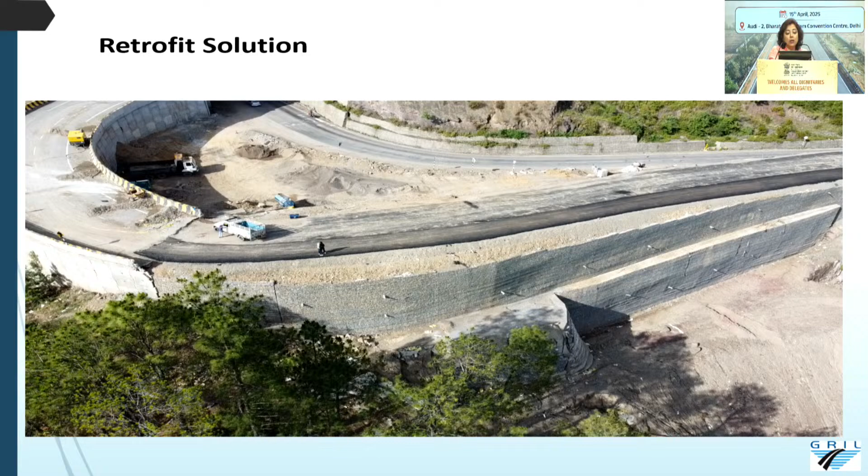The intelligent automation in construction, talking about intelligent grading, we also adopted in a few of our projects. We anticipated it will finish on time, elimination of guesswork and rework, accurate and fast real time monitoring will be done, precise control over each blade of the grader, and all will happen. Nowadays all the project RFPs have the provision of intelligent grading and intelligent compaction, like equipment equipped with instrumentation, thermal sensors for bituminous work and GPS, everything real time compaction, real time feedback, everything will come.

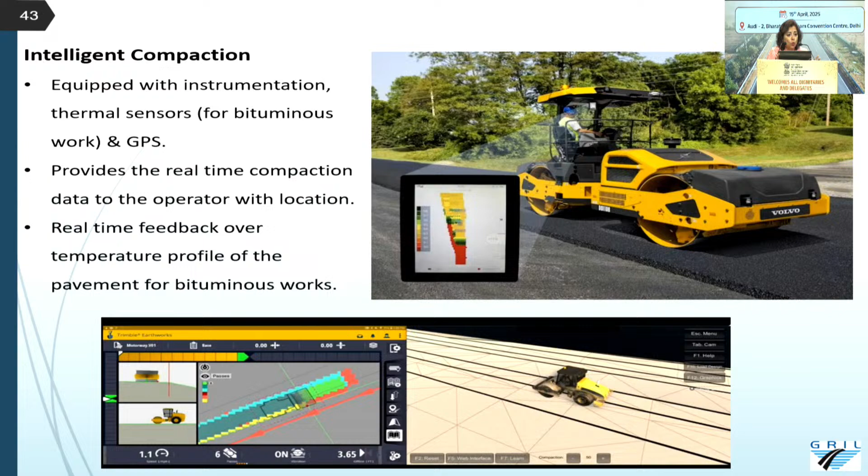But no, it does not happen. For 1 or 2 days our supervisors, graders and operators worked, the next day they gave up. No one is willing to do it. So, what is that? We need to understand it in detail in the Indian condition.

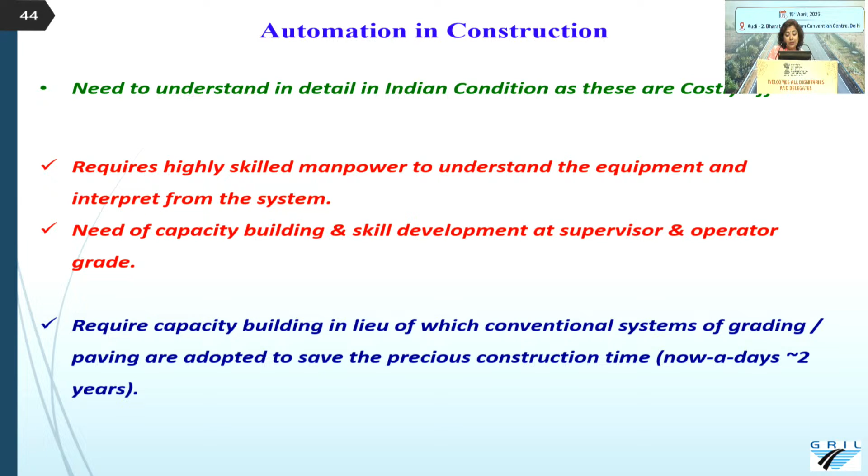These are costly affairs and require skilled manpower to understand equipment and interpret the system. Capacity building is required. So, in lieu of the conventional system, if one fine day we say that all projects should have intelligent grading and everything intelligent, it does not happen. So, capacity building and retaining labor is the next thing that we as contractors are facing.

The role of government, industry and academia - this is a broader platform where we can discuss how we can bring up initiatives, like when we are bringing in new technology, workers getting trained, and skilled workforce should be retained. Compensation and benefits can be given, continuous learning and professional development can be given, and child education and family stay can be accommodated at the site level - that is what we are thinking of as contractors.

So, that is all from my side.

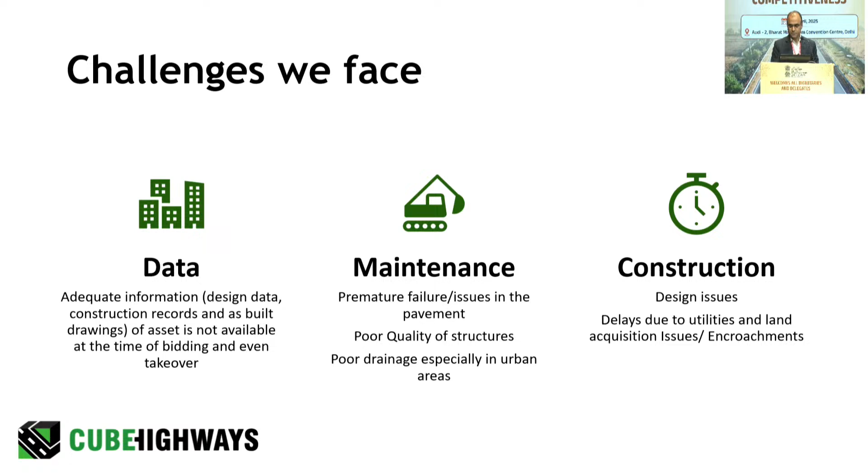So I'll just highlight a couple of issues - our first project was Jaipur Mahua. So when we took over that asset, we saw a lot of rutting and premature failure on the right carriageway. So we investigated why it's happening. One thing we could find out was that there was a lot of marble-carrying truck traffic, so overloading was one of the main culprits.

Another thing was the temperature ranges - ambient temperature there was around 47, 48 degrees, leading to pavement temperature in the range of 70, 75 degrees, and in winter it goes down. So what we needed, when we had to do the overlay, was a rut resistant material. So we did a lot of research and then did test sections of around 50 kilometers with HiMA, SMA and PMB, and monitored the progress and it worked well. So it's necessity is the mother of invention - we had to explore how do we deal with the issues, so we came out with this new material HiMA.

Another issue which I would like to share was the Delhi Agra section when we acquired it. There was one VUP and we were seeing that in the approaches there was failure time and again. So we tried to find out why it's failing, and when we did some trial pits we found that there is water ingress in the granular layers.

So how do we address that? We milled all the pavement, and first we put in a subsurface drainage system, because we saw the geometrics of that road and said there's an issue with geometrics and water is bound to come. So then we had to address that water - how do we take it out of the pavement? We set up the subsurface drainage system to address it, and now it has been already 3 years. We never faced any challenge in that section again.

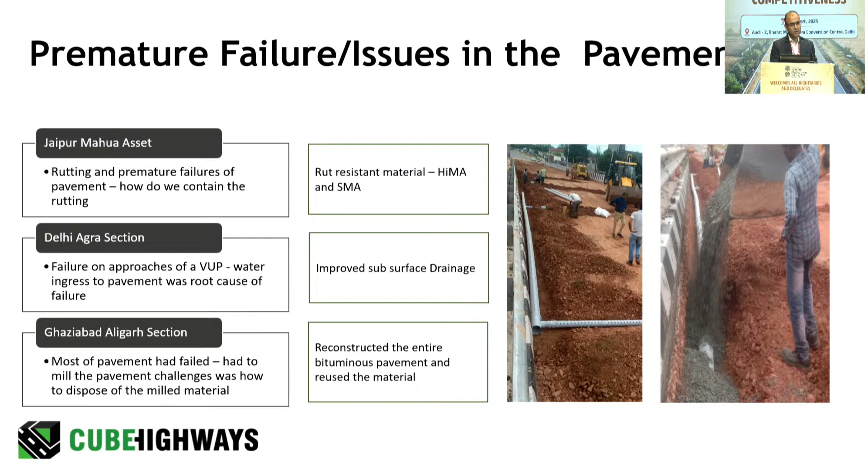Another road, Ghaziabad Aligarh section, when we took over that section, we observed that the entire pavement we had to mill. Now the challenge in front of us was, when we are milling around 90 kilometers of 4-lane road, what do we do with this milled material? So then we explored various options, and that's when we decided to go for cold central plant recycling, and we saved around 425,000 metric tons of aggregates and significant bitumen as well. So it was environment friendly, and we saved some cost also. That's how we addressed a couple of these challenges.

Similar challenges we see on the structures. When you see any RE walls constructed maybe 20-25 years before, you will see them still intact, but as Secretary Sahab was saying in the morning, with speed probably we have somewhere lost quality in some cases. In RE walls it looks very frequent that most of the RE walls you will find bulging. That has become like a norm these days, and we have to address that. So as Atasi said, soil nailing, replacing some of the panels, sometimes even opening the RE wall and reconstructing a part of it - that's all. Those are things which we have to do.

Then not only the RE walls, but even the structures' quality has also gone down. So when we acquire some assets, we see sometimes bearings in bad shape - you can see the pictures around. So we have to replace the bearings. Sometimes we have to replace expansion joints, and sometimes, years together, after some structure has been constructed and bearings have been installed, those bearings have never been unlocked. So during construction they were locked, and it is still resulting into some shear cracking on the girders. So those we have to address.

Then another thing is the concrete quality issues. We see a lot of honeycombing, voids, poor compaction issues, and lesser concrete strength even. So sometimes we have to do epoxy grouting or cementitious grouting, or sometimes even carbon fiber reinforced polymer laminates we have to use for the strengthening of the concrete. So these are a couple of challenges which we keep seeing.

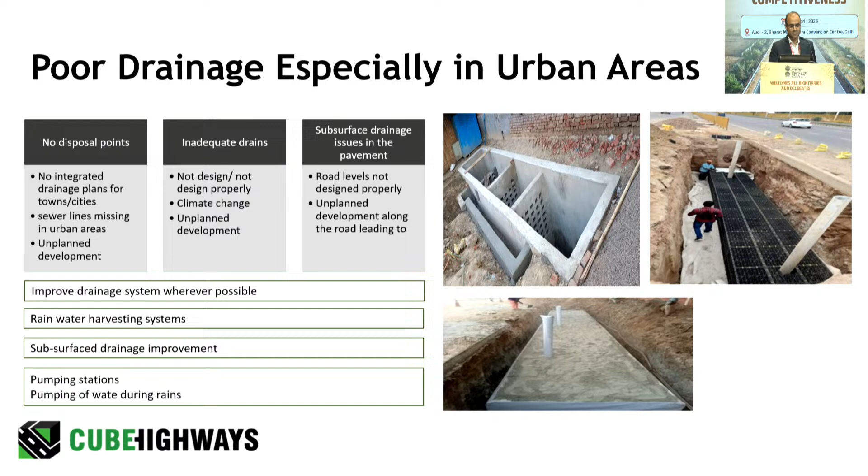Sometimes we improve wherever we can get some disposal point, we construct drains, and if nothing works, then pumping stations, and pumping is the only way we have to go ahead.

So how do we address these issues in the long term? To me, the approach has to be data driven, and we need to have our assets in digital form, right from the concept stage till the operation and maintenance stage. So BIM, which is now...

happening across the globe, I feel we are lagging behind on this, and it's high time we start working on BIM implementation on our road infrastructure, because we have already constructed a significant amount of road infrastructure and we don't have the complete data of our infrastructure. So we need to start working on that.

Because the only way to make the system work is using data. We have to reduce human intervention. Every stakeholder has to be on one platform, so it's a single data that people are working on.

When I talk about BIM, basically when you work on the concept, you create the 3D model at that stage itself, and keep upgrading it as the project progresses. The design consultants work on the same model, NHAI also gives approval on the same model, and the people reviewing it, proof consultants, also give their comments on the same model, and the contractor also works on the same model.